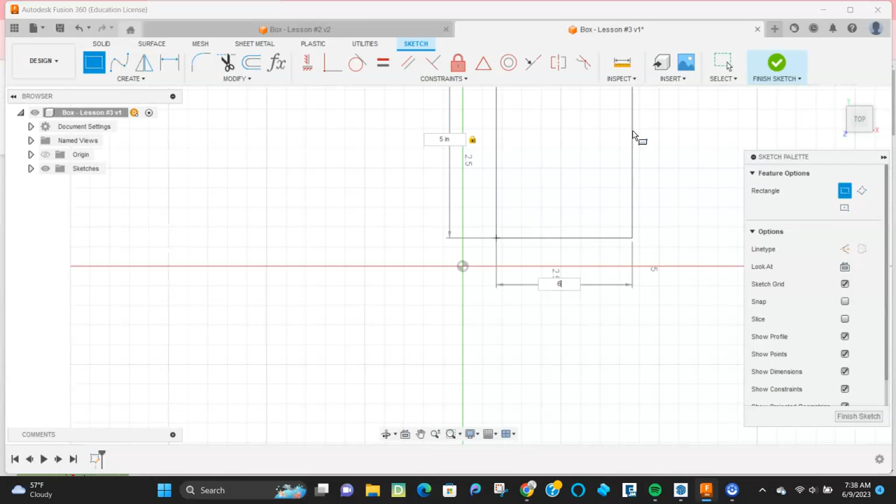So this is our third box that we're going to create. And for this box, we're going to actually make it more like a real box that you would make out of pieces of wood, where it's not just one component, one big piece.

So I'm going to create a sketch again, starting with a rectangle, and then I'm going to extrude that piece up. I'll hit E, pull it up, and just build the bottom of my box. So if this was a half-inch piece of wood, now I have a piece of wood that would be the bottom of my box.

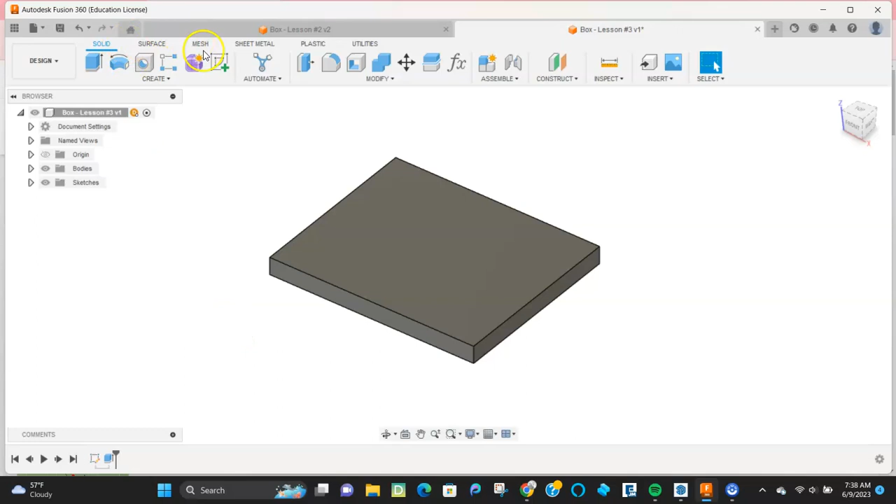I'm going to create a new sketch, and I'm going to go on the surface of the bottom. And I'm going to specify some rectangles that again are going to be that same thickness of my piece of wood. It's going to go in the corner, and then it's going to go across by, I'm going to make it a half-inch.

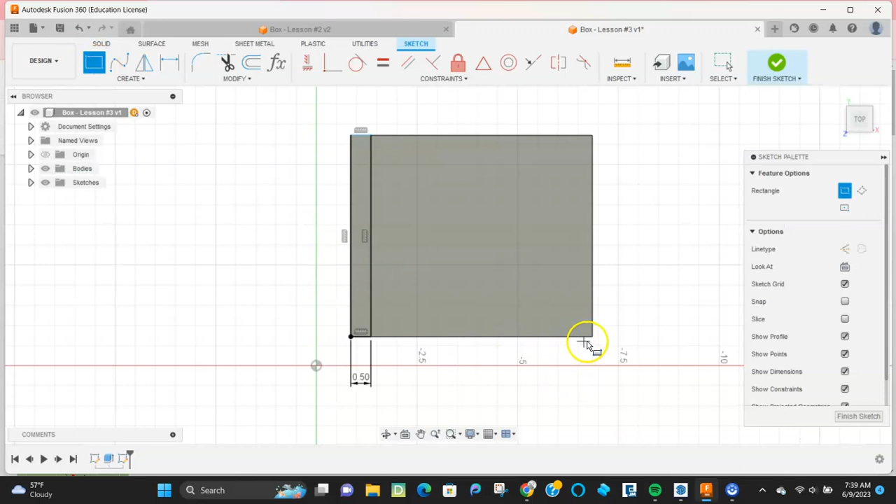And so I have that component there, and I'm going to do the same thing on the other side. I'm going to do my rectangle command, and go across at a half-inch. And now these would be my sides of my box. I'm going to finish my sketch.

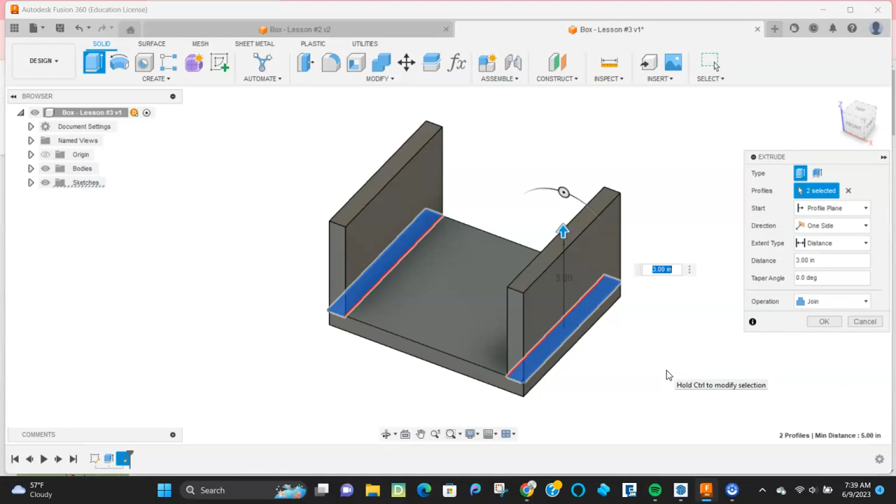I'm going to rotate a little bit so I can see it, and then hit the E key to extrude those up. I'll click that and that component, and those are going to go up by whatever thickness or height I want my box to be. I'm going to hit OK. Once I'm fine with it, I'm going to make it 4 inches.

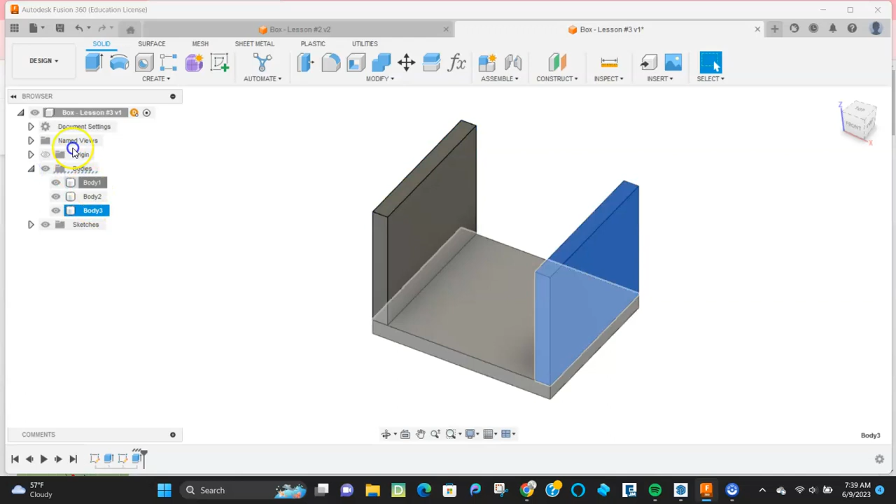Now, one thing we need to note is it has combined my bottom and the sides to be one piece, which is not how I'd actually build it. So this is a really powerful part of Fusion 360. I can click on the timeline and go back, and I can see instead of hitting join, I hit new body. That new body now gives me 3 pieces, which is what I'd actually physically have in the real world—2 sides and a bottom.

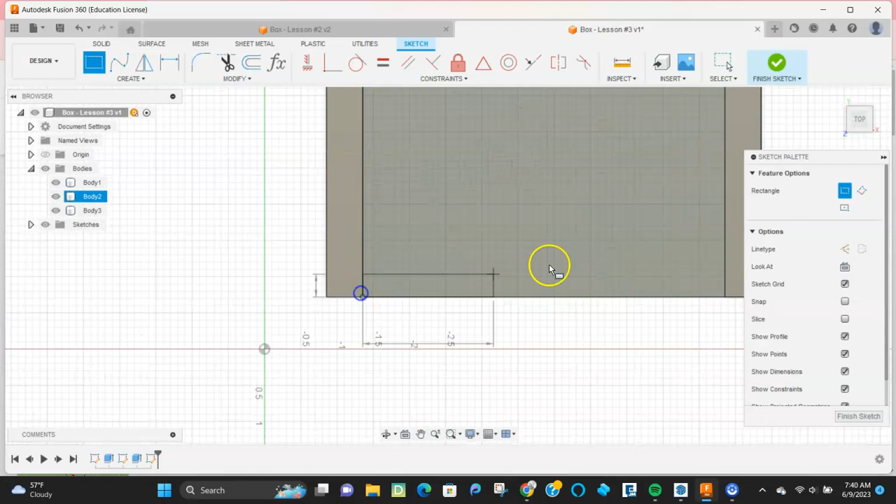I'm going to hit new sketch, and then again just make a rectangle. I'm going to specify my rectangle to start in that corner position as best I can. I might need to orient myself a little bit so I can get it there. I'll hit the top again, and start again in that corner—there you go, it snapped to that piece. I'm going to go there, and again, it's pretty much half-inch, so I'll make it 0.5.

And then the same thing on the other side, where I'm going to go from endpoint to endpoint, and make it a half-inch. Then I'm going to reorient, finish that sketch, and extrude up.

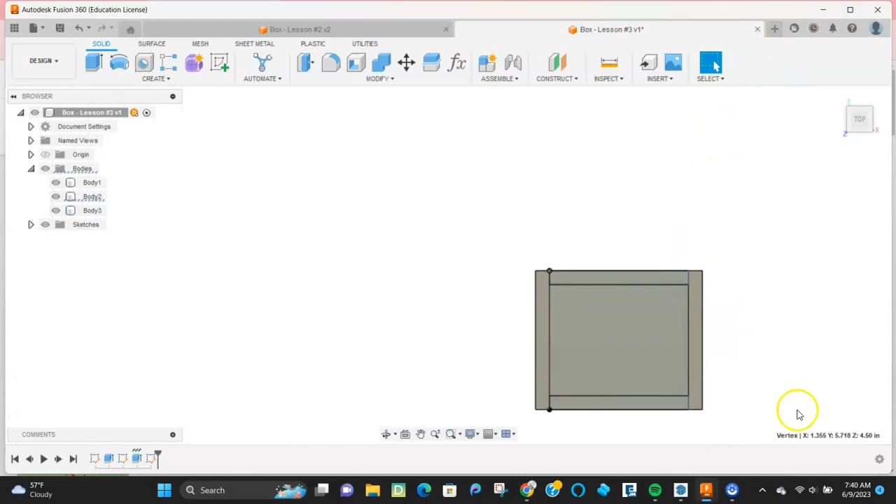In this case, what I'm going to do is click the side—these would be the side of the box—and get those two surfaces by shift-clicking. Then I'll either have to pull up to the right distance, which I know is 4 inches. But what I can also do is make sure I make these new bodies so I get those pieces of the back.

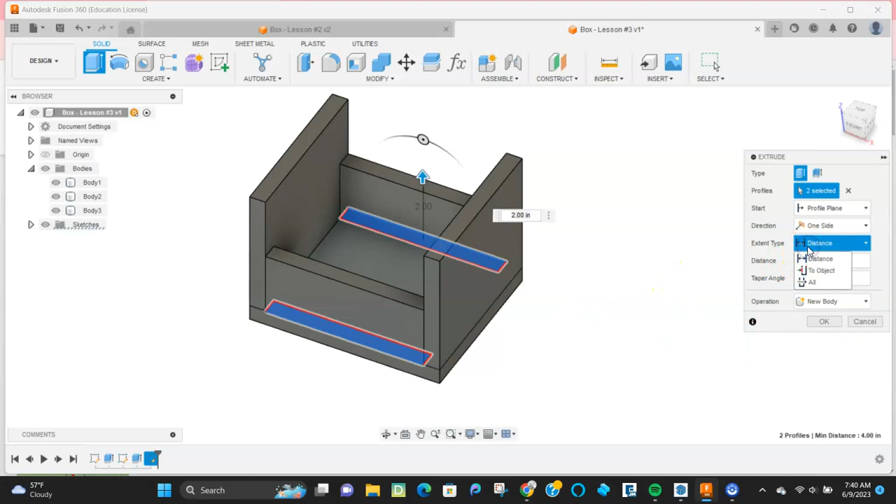And now I'm going to actually do it to the object. What I want to do is go to the top of the other side. So I click there, and it'll automatically bring it up those 2 inches.

So now I've actually created a box that you could actually build with physical materials such as wood. You can see that I have all of the bodies there—those 5 pieces that make up the size of my box. I'm going to save it.

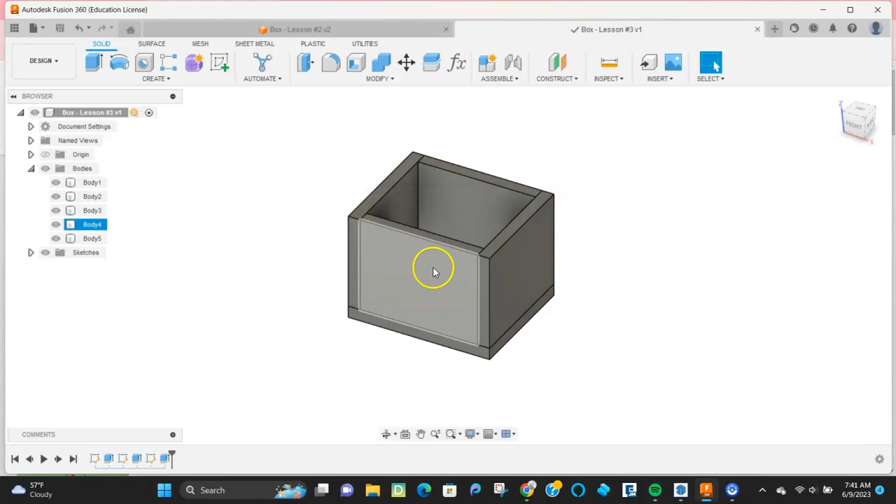And now what we could do is look at this in the browser—we could share that piece. So I'm going to go back and right click on the actual document, and share a link. You'll see here when I go back and share a link, then click on share a link—sometimes it doesn't pop up right off the bat. Do it again, hit copy.

I'm going to bring that into the browser. And when I bring it into any browser, what you'll see is a version of the box that we created.

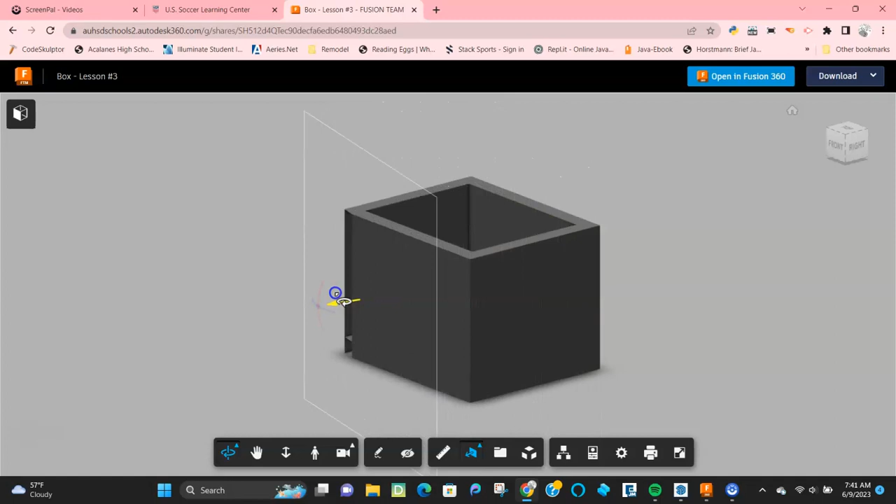And we can do a couple of things. We can now look at sections through that, so I can kind of slice through the box. It looks kind of like one uniform piece here, but we'll see in a second it's not. So here is the section—I can see what that box would look like at an angle, or as I slice through it, if there was more complexity to it.

And then I can also explode the model, and that piece will give me the ability to look at all those sides, all those components. So you can see that breaks it apart—so we have that explosion view. See, okay, that's actually created with 5 unique different pieces.

All right, so again, a much better box than we built before, where we actually have something that we could see of what we'd actually build in the real world.